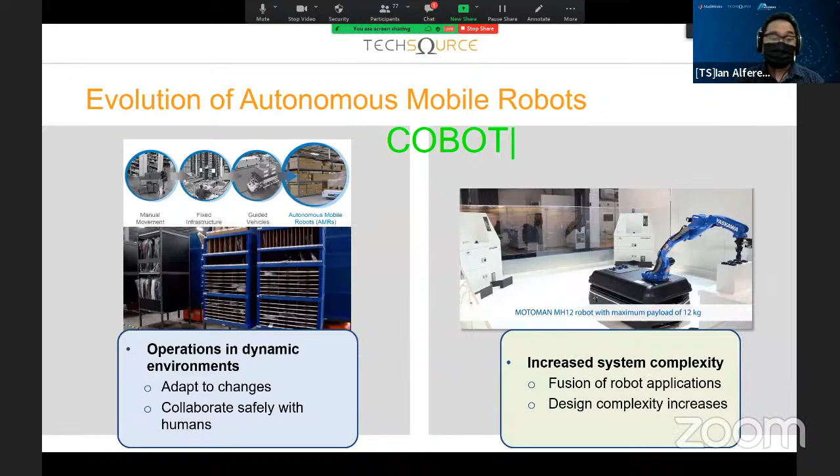So generally speaking, all of these robotic systems are becoming really, really complicated. So first things first, there's like two things now in the robotic space. One is actually cobots. When we talk about cobots, that's like a robotic system that involves a human person within that particular field. So it means there's a human person within the space of the robot, and they need to work together. And in this kind of category, there's a lot of things to consider - there's probably safety, probably complexity in terms of avoiding a human being, or deciding something for itself to be as safe as possible. And it becomes as complex as it is.

So right now, your ground vehicle is connected to a particular arm itself.

Let me just restart my PowerPoint. Give me a sec. All right.

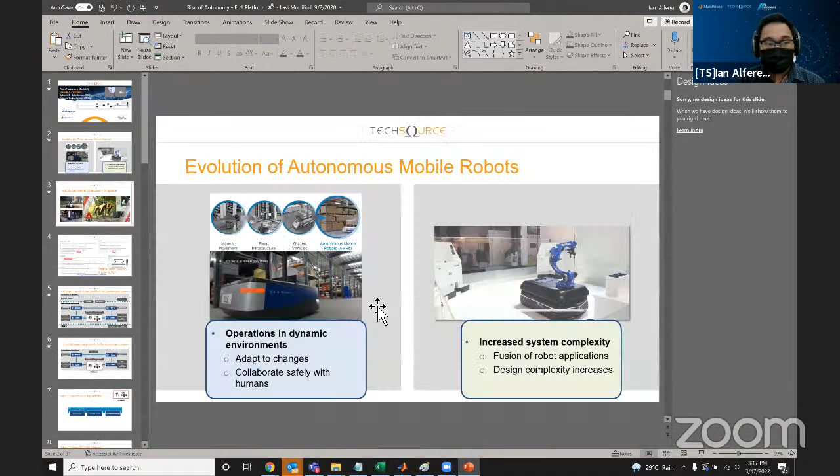I created this slide about a year ago. One thing you'll notice is that here in Singapore, where I'm based, there's a lot of hype. I'm not saying it's not justified, but there's a lot of investment pouring into startups, student organizations, and student competitions involving robotic platforms.

You'll notice here is an AGV, a ground vehicle. This one is also an AGV, a ground vehicle. This one is what we call a quadruped robot, so the walking dog robots are actually called quadrupeds in some sense. You'll notice they probably attach a lot of sensors.

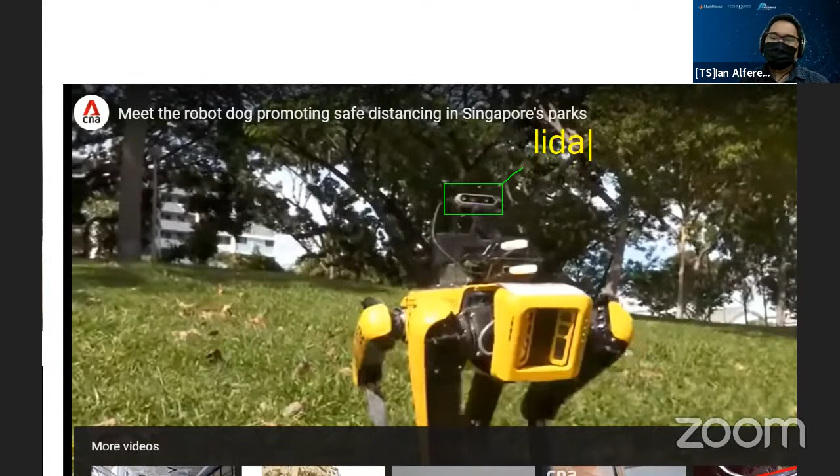Let me zoom in really close. You'll notice this is actually what we call a LiDAR—actually, no, it's a stereo camera. And then you might have other sensors here, like your IR cam, your typical image camera, and so on. So there are multiple sensors this robot can have, but you need to understand what they're going to be used for.

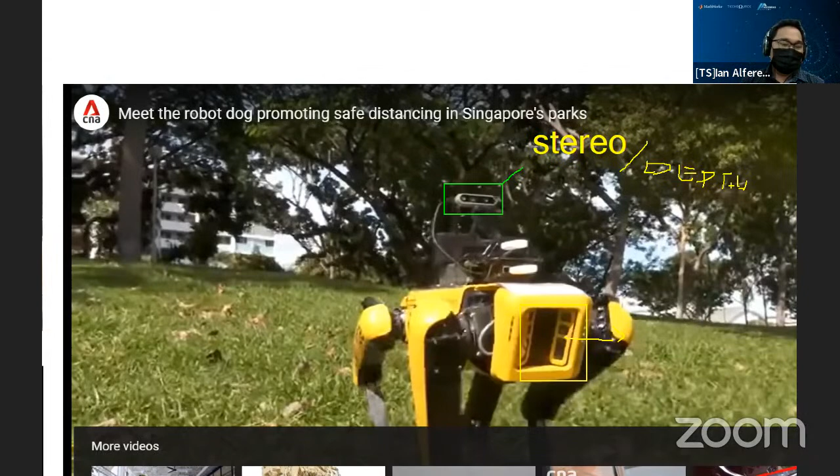First things first, you need to do the platform. The platform is basically: is it going to be a ground vehicle? Is it going to be a quadruped? Is it going to be a UAV? Is it going to be a surface vehicle? Is it going to be an underwater vehicle? All these things need motion models, or kinematics models, because that's what we want to control.

So there's MATLAB, MATLAB and Simulink, there's ROS, and as I mentioned earlier, there's Gazebo, Unreal Engine, Unity. These are pretty much all the things you might want to be familiar with if you want to go into that particular space, or in your future career as well.

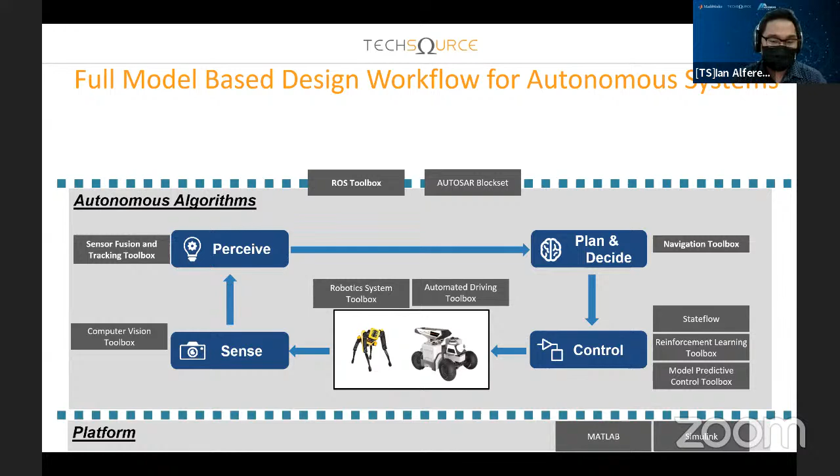So in this topic, we're going to focus more on the platform, then we'll talk about perception, sensing, and plan and decide later in the third episode.

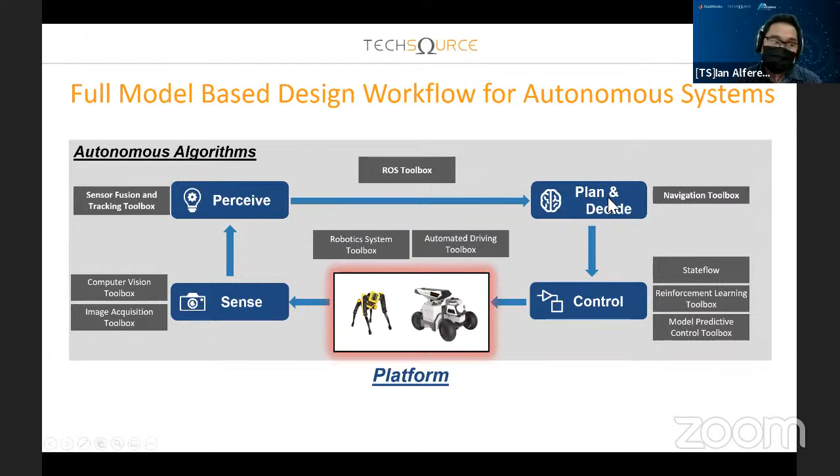In the space of simulation, there are actually three things that MATLAB can do or import. One is what we call a physical model. Second is an abstract model. Third is that you can get an external robot model from the vendor itself.

If you're going to create a physical model, you might need your model from Solidworks, NX, Onshape, or any CAD platform, and bring it to Simulink and simulate. This is where your mechanical engineer is really good at, creating different models in their CAD environment setting. But in a CAD environment, you cannot simulate a kinematics model. It's really just creating that assembly and building the necessary components, but you cannot do kinematics modeling from there.

The other thing you can do with Simulink is bring in a kinematics model. What I mean by a kinematics model is basically an equation form of the system. If you think about a robot, what we want from it is really all about its pose and orientation, because this is what we want to control. Pose means to say, where am I in 3D space? This is your X, Y, and Z. Orientation is more towards pitch, yaw, and roll. So pretty much you're trying to have a system that can move in free space but has these properties.

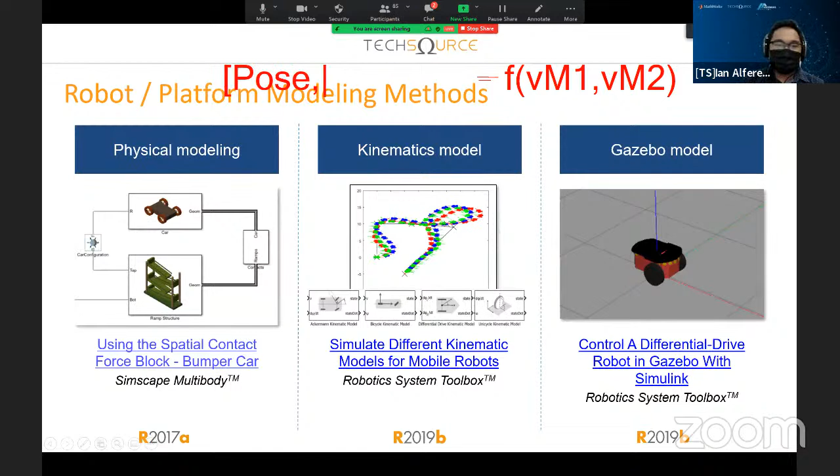I move the motor 5 meters, then the robot will move 5 meters with a certain orientation. So imagine what we're going to do is create an equation: F of velocity of motor 1, velocity of motor 2. The results of this are basically our pose and our orientation. I'm not going to give the full equation here, but this is what we want to do. The question now is, what is your F?

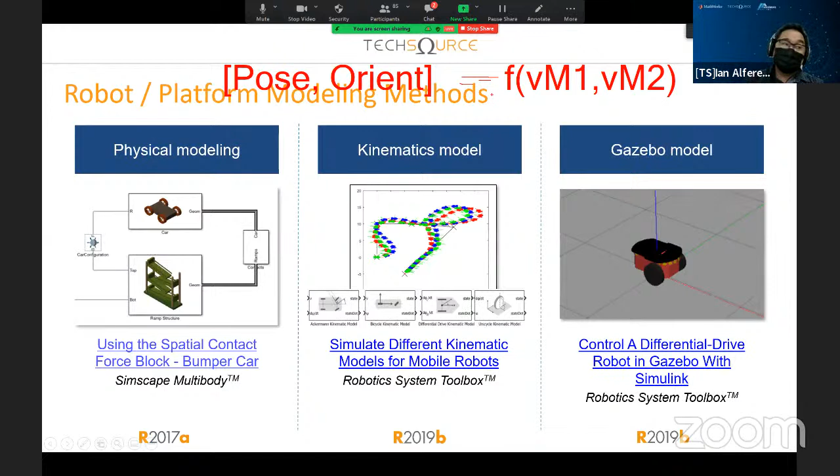This goes back to mathematical equations. I'm not saying it's a hard topic, but your fundamentals in calculus, algebra, geometry, and trigonometry would be very important here. This is where you actually develop that kinematics model.

What MATLAB offers is that there are already ready-made blocks for common robots. You would see here an Ackermann kinematic model, which is probably similar to a car setup, a bicycle kinematic model, a differential drive—this is actually our example later—and then a unicycle.

The third one is basically a Gazebo model. When I say Gazebo, it's actually a third-party simulator, but the majority of your robot makers—like Kinova, Kuka, Universal Robot—or any vendors of robots in the commercial space normally have a Gazebo model of their robots.

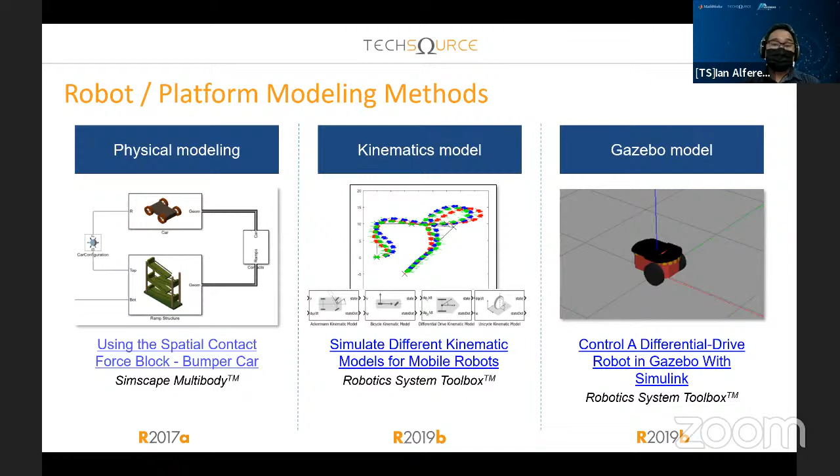So if you think about a kinematics model, you try to really go back and solve the kinematics equation. You need to study back your trigonometry, algebra, calculus, and advanced mathematics in some sense. But later, I'll give you an idea how to solve a very simple equation for the differential drive kinematics.

So I'm going to go for physical modeling first. Normally when you have a physical model, you start with Solidworks or any CAD design. But the nice thing about MATLAB and Simulink is that we do have the capability to bring in CAD design directly to MATLAB and Simulink.

One thing I really like about this workflow is that when you build your model in CAD, it already gives you the properties of your weight, the inertia required to move a particular object, and the type of material you use. We're not just bringing in a property like, I have a box and this is its kinematics model. What we're doing here is you have the design of the robot itself in a CAD environment, which already has its properties in terms of weight, material, and so on. Then we can bring that information to our simulation.

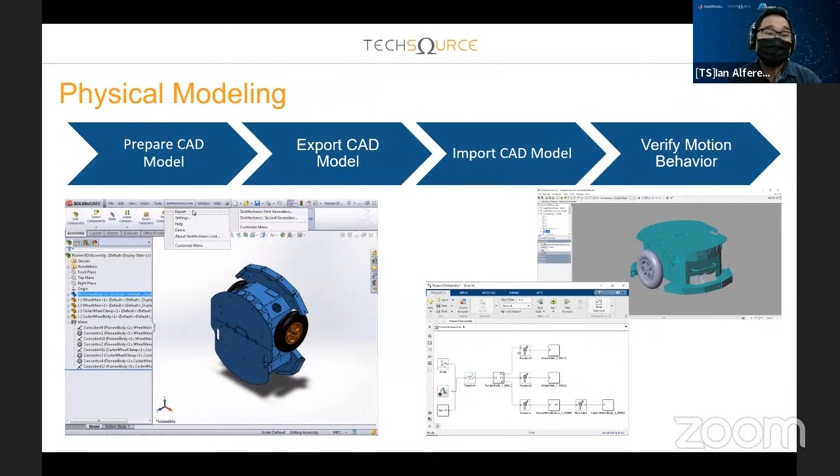But in this case, we just say, okay, I have a CAD design. I want to bring it to Simulink. So generally speaking, for SolidWorks or any popular CAD design software, we can actually just bring it to MATLAB and Simulink.

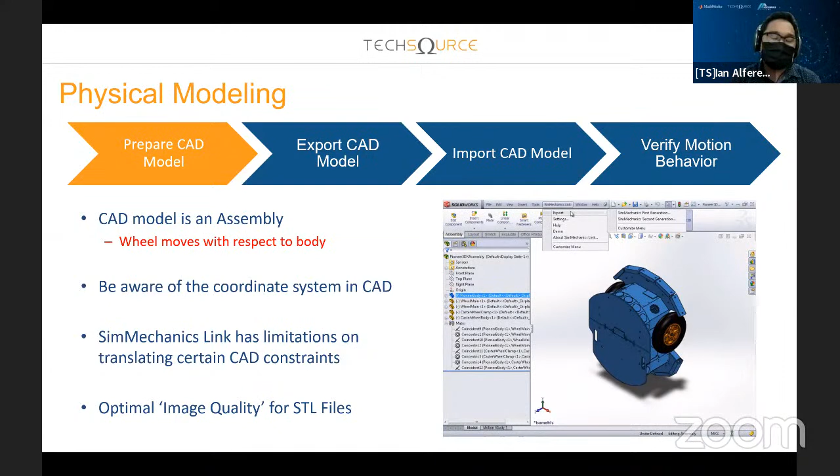So this is just a very simple use case, right? We prepare the CAD model. We then say, okay, I'm going to export. So you would notice in SolidWorks, there's just an export tab here. Then we just generate the SimMechanics, so this is the old name for Simulink, Simscape multi-body.

Right, so you export, you get all these STL files. If you're familiar with STL, basically that's your CAD design already, right?

There's just something wrong with my PowerPoint today, that it keeps on restarting. Maybe I don't need to put it in full screen mode.

Right, so once you have all these STL files, the next thing you want to do is go to your MATLAB environment. And from here, we just need to tell MATLAB that I already have an STL file and use the function smimport.

So once you have the smimport, I am just going to get this XML file and press enter. Normally the XML is actually just the mapping of how all these STLs are connected, right? And once it's there, you will get a Simulink environment of that connected parts.

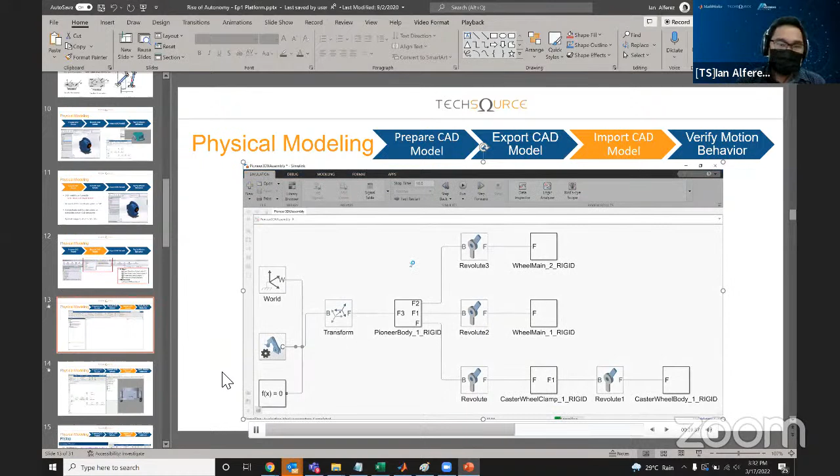So when I press the play button here in Simulink, you will notice that I have this model already, right, in Simulink perspective, not in CAD, but in Simulink perspective. So I can move it around, I can add some movements and so on and so forth.

But what we're trying to do here is bring in models to Simulink so that we can add in some blocks that are necessary for us to build the robot physical model, right?

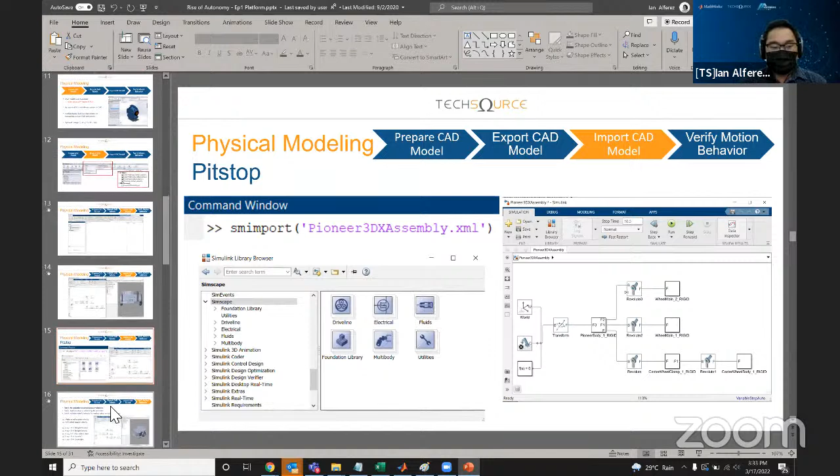So if I have the model now, I need to verify my system, right? So since I have the CAD model already, the next thing I want to do here is increase the size, and just verify some behaviors or characteristics of the system.

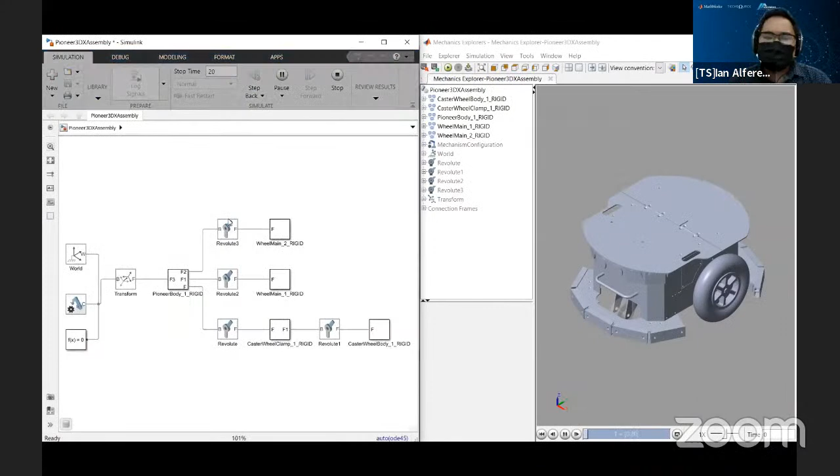So you would notice actually the caster wheel, this wheel is actually moving without any actuation. And this is due to the different setting of the gravity. So here I just say, okay, maybe when we try to import it from SolidWorks, there's some discrepancies on where gravity is being associated.

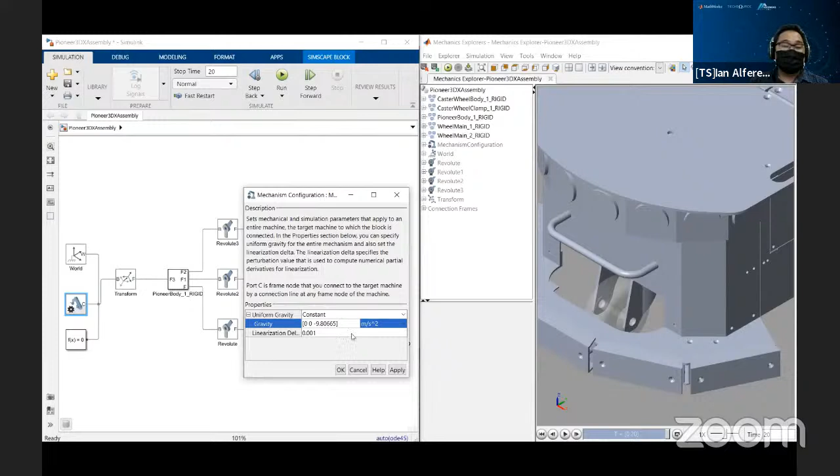So I just say, okay, maybe it's going to be in this axis. Then I click apply, click OK. And when I simulate it again, I should not see any movements at all already, right? And here you will notice it's not moving anymore, okay?

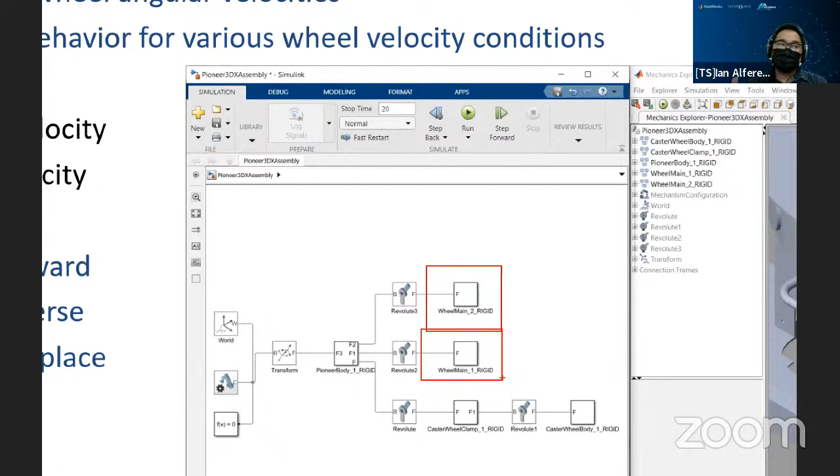All right, so next one is I want to turn the wheels, right? So because I know that this is wheel number 1 and wheel number 2, how do I tell MATLAB that I have a motor attached to this wheel? Or I have a torque source or a command from a motor to turn 50 RPM, 20 RPM, 10 RPM, right?

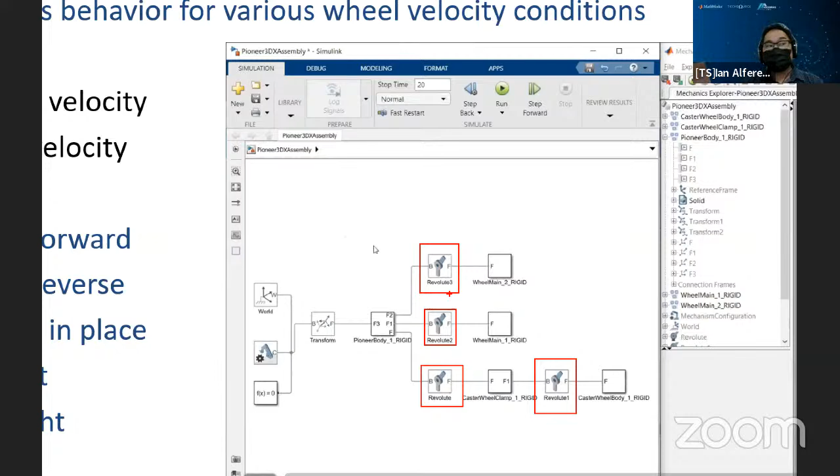So the nice thing about MATLAB is that since I already have these joints, revolute joints, this is actually coming from the design that you have in CAD saying that this is jointly attached with a revolute joint to the main body. That means there is probably a bearing, a motor, a servo motor that allows it to turn on that particular joint, right?

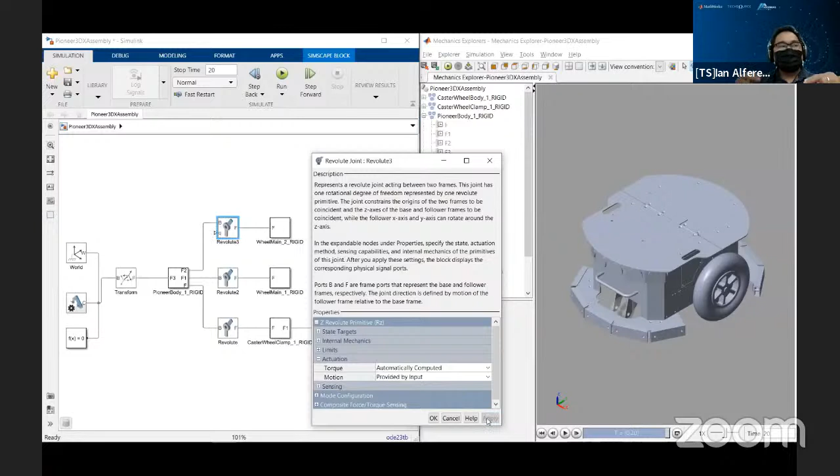So if I just go and play that section here, you will notice that there are some options for me to add sensing and actuation. So here I just say actuation first, but the idea here is that there is a motor attached to the system.

So I can then say, I just have some blocks here, a constant block and an integrator block. Do take note, this is in the space of like meters per second or degrees per second or radians per second, right?

So I'm trying to tell that particular revolute joint that you're moving at a certain rads per second. When I integrate, I just put one here. Then when I press the play button, you'd notice that I can actually move the wheel, and the wheel is now turning. I just changed the view, left or right, and the wheel is turning.

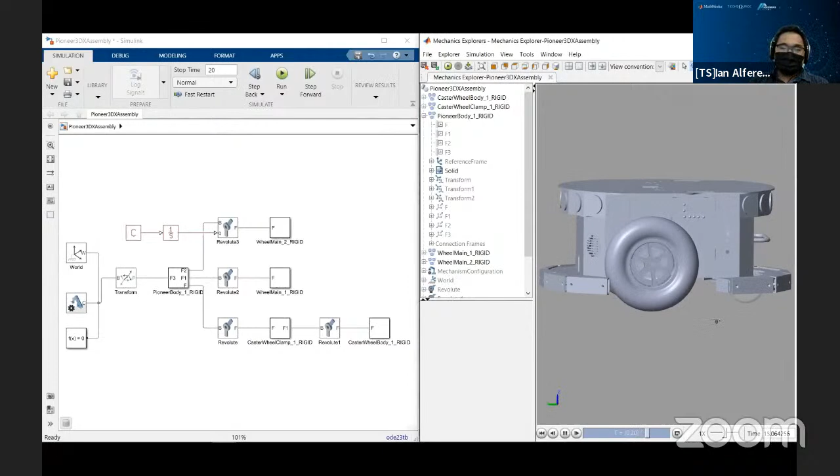You'd notice also in that particular setting that motion is provided by input and torque is automatically computed. Just imagine yourself, you have a motor control. Definitely you have a PID controller for that. It's a closed loop system. So when you tell a system to run at 20 RPM, the PID or closed loop controller will tell you, I'm going to run at 20. No matter how much torque is required, I will turn at 20.

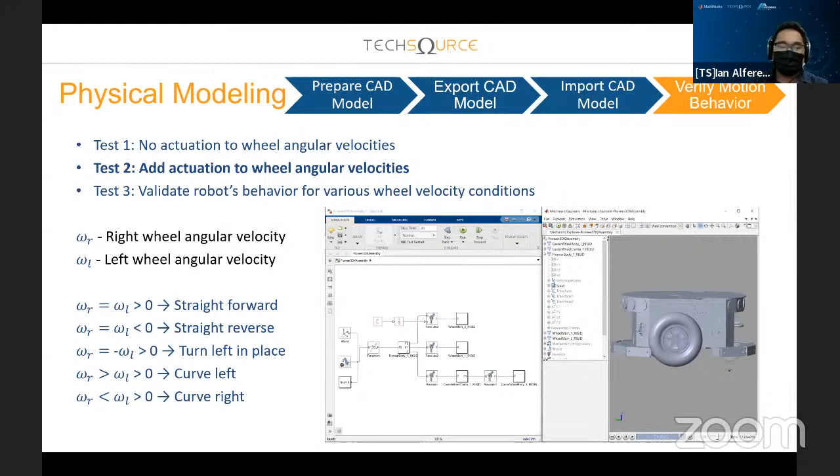So this is like that kind of setting, where I'm just controlling the motor to spin, right? But now what if I'm going to add in the motion model of that particular robot?

As I mentioned, this is where you need to go back to your trigonometry, your algebra, your fundamental mathematics, because once you have all these things, I want to create the equation of the pose and the orientation. So if you think about it, what I want is to control the speed of both wheels and understand its movements. I want to create a relationship between velocity of left wheel, velocity of right wheel, and its pose and orientation.

You'd notice this is the typical equation of a differential drive system. Just imagine you have a differential drive system. A good idea is that if this wheel is at 20 RPM, and this one is 15 RPM, so this one - I'm going to use red color - is faster compared to this one. So this one would travel faster compared to your right wheel, meaning it would turn right. So you can actually steer the system with this setup.

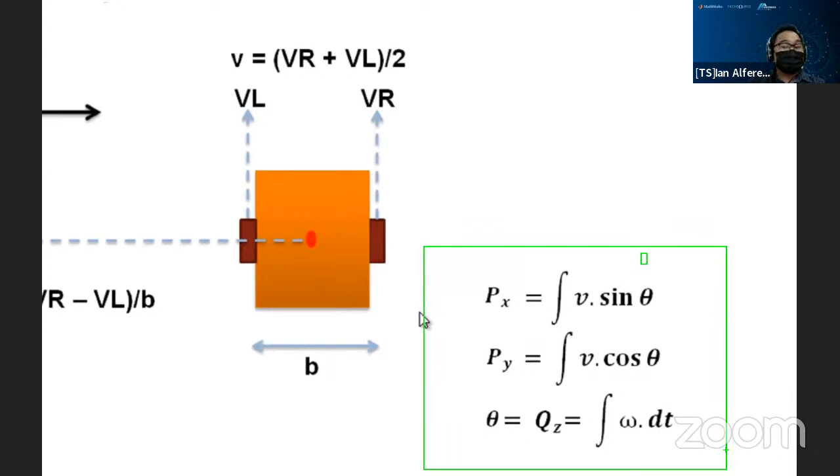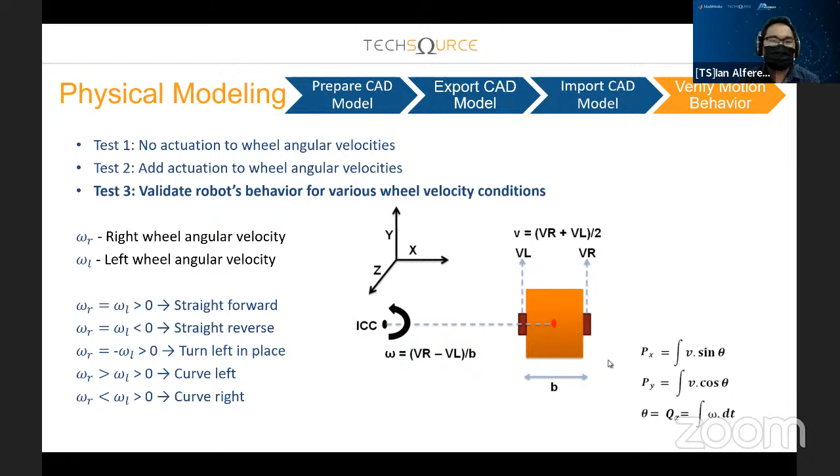So with that kind of idea and concept, you can build your equation. The question now is, how do I come up with these equations? Generally, this is how you'd write it in the motion models. You start off with a graph, that this actually has certain points on the system in 3D space, and you need to model it. But as I mentioned, there are already popular equations for certain robot models - it can be a robotic arm, a ground vehicle, a car, or a motorcycle. This is already a given set of equations.

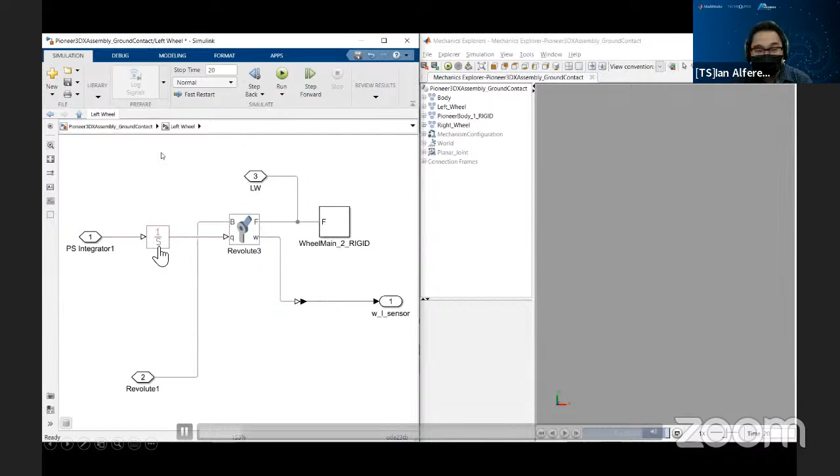So in Simulink, what I did is I brought all these equations into Simulink. If I move further, I still have my plant model from the CAD design. I know that I can control it through this block here, but I just added sensing - imagine it's a virtual sensor. I'm adding a virtual sensor, but in actual terms, this can be a tachometer or an absolute encoder or something like that in an actual vehicle.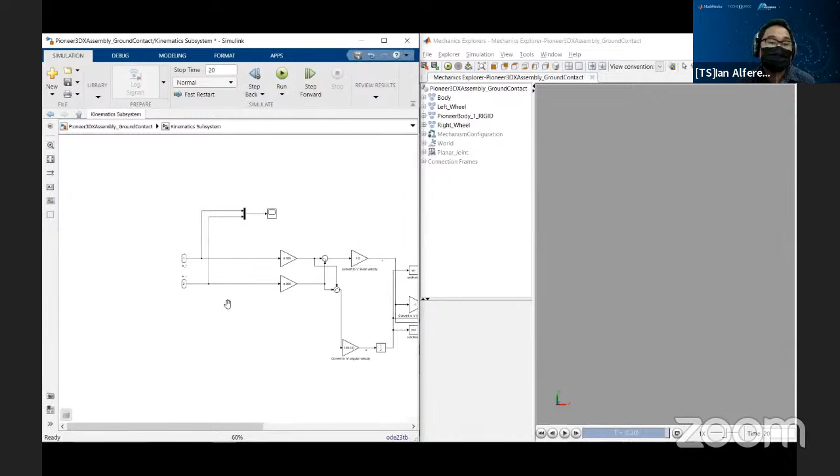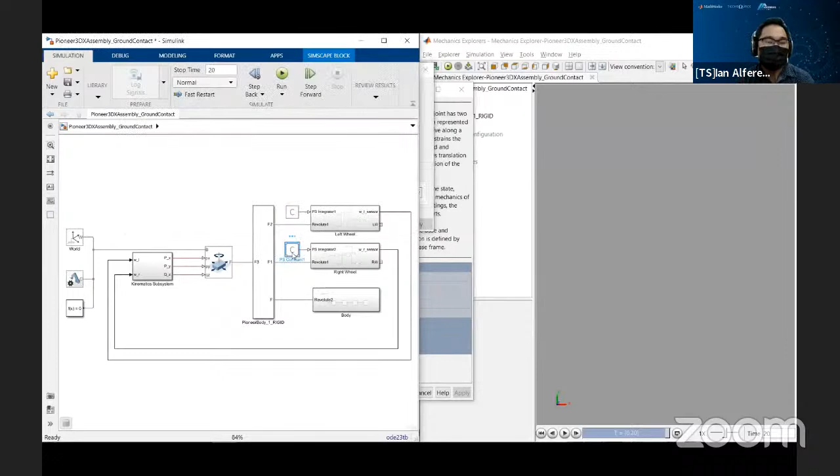And the equation that you saw earlier is actually made into a Simulink block. I just place it here in this subsystem. So now I have this planar joint to make it like this is my platform, my space that I want to move left and right. Based on what I mentioned earlier, I want to have a setup wherein everything is equal, and then the robot would move straight. What if now my wheel has a different setting?

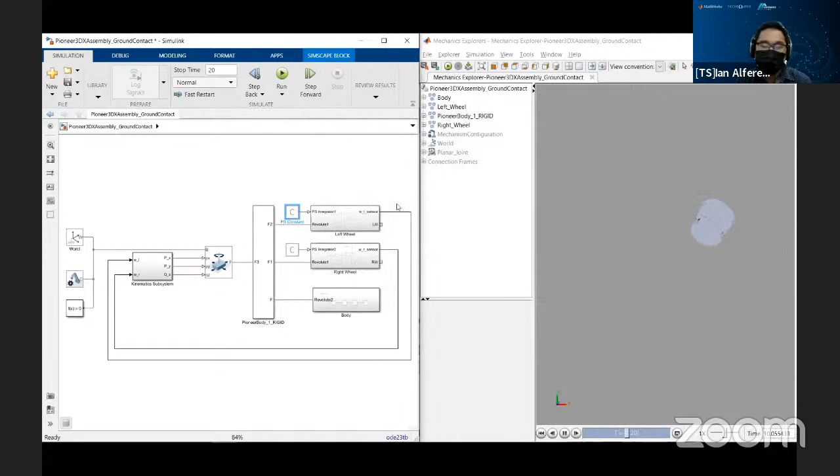Left wheel and right wheel have the same value, but one is negative, so it turns at its own location. Next, I have like 0.5 and the other is 1, and definitely it's going to turn left.

Okay, so the idea here is really creating that motion model, at the same time bringing in the information about the weight of the vehicle, the torque that I need to move the vehicle, and also its kinematics model. So once you have this platform, just take anything already, it can already do whatever you want to control without even buying that hardware, right? Because I'm already controlling it.

The next thing that I can do is probably add in PID controllers, right? Because when you have your platform, let's say this is your robot, and this is part of your control systems, there's going to be like a feedback. And when we say we have our sensors, definitely we know that since we have the kinematics, a function of velocity of our left wheel, velocity of our right wheel, the output of this one is basically our pose, X, the location in the X space, location in the Y space, in the Z space. But let's say a ground vehicle is always operating in a plane, so we don't need to go for elevation. And what we need is basically just the angle.

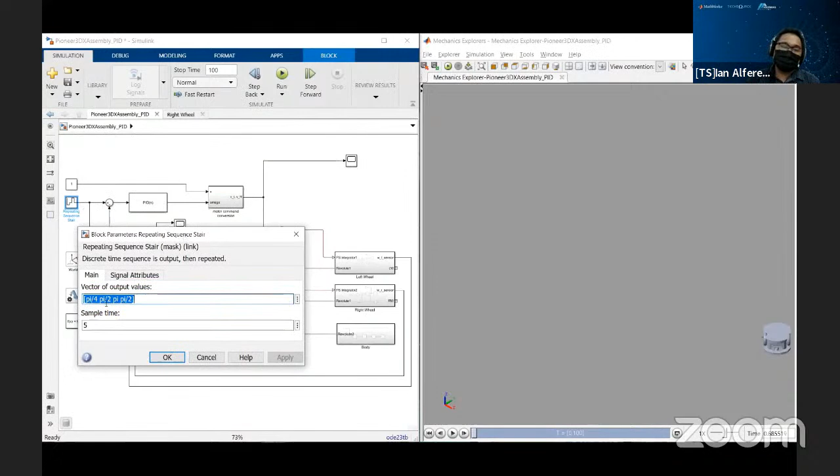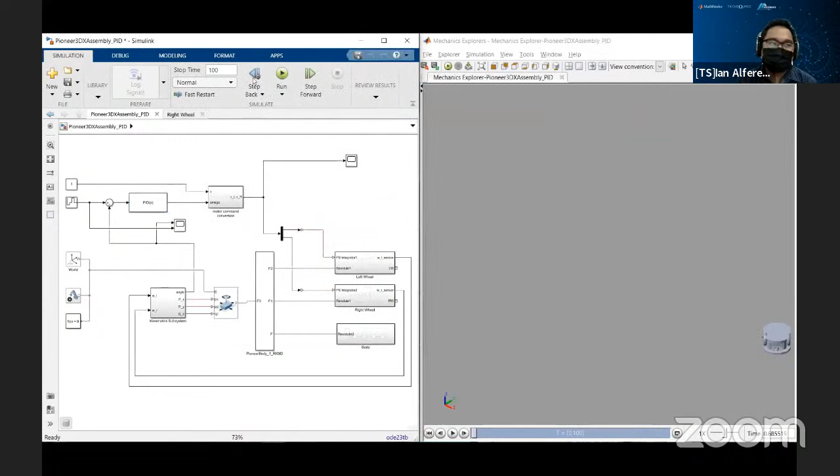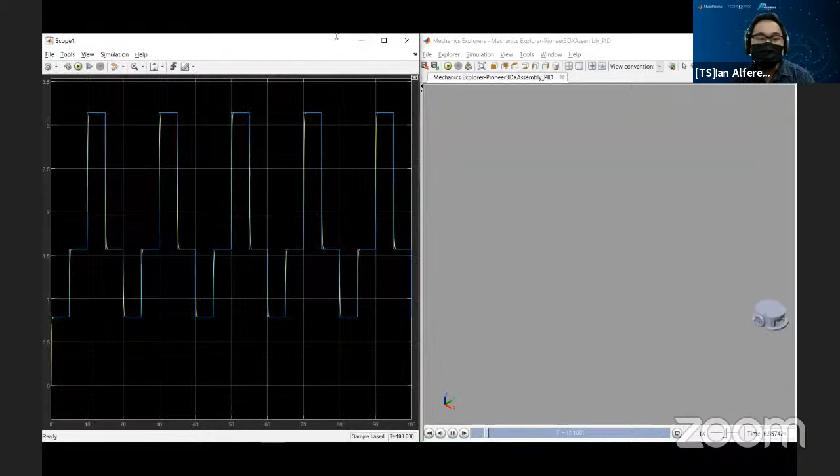Oh, can you move in pi by 4, pi by 2, pi? So this is actually telling the robot to move in a certain space. This is just an example, but let's say you have a maze or a warehouse, and you want the robot to know from point A to point B, I have this path for you. Please follow it, right? And then you would notice that it will follow that path where I am guiding, or giving it a trajectory where and how to move, using a PID controller.

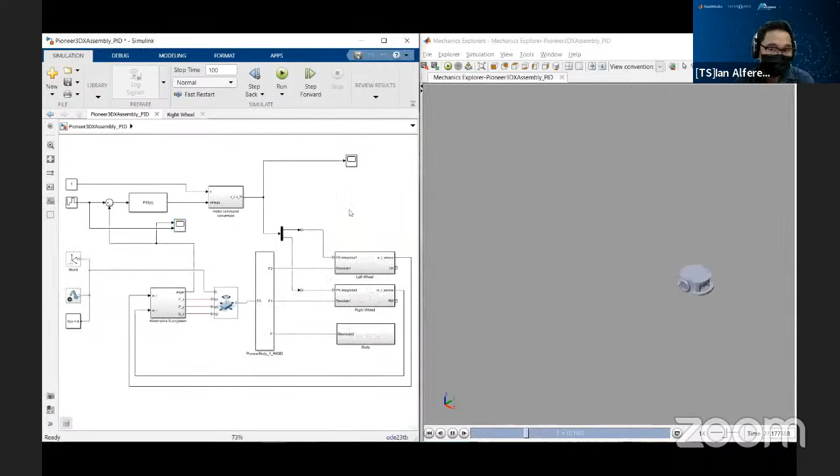So again, when you are developing a robot system, first things first is really you need to have that robot. So it's either you buy it or you create a simulation model of that robot. Now the question is, what's going to be your application? So this is one case of that application already. And I haven't talked about sizing of the motors yet.

Like when I say sizing, there's a ton of motors available out there in Alibaba, AliExpress, Mouser.com, or Element14.com. There's a lot of types of motors, but which one would you buy? You're going to just say, okay, I'm going to buy a 24-watt motor, or I want to buy a big battery, this size of battery, but your application is actually just 20 minutes or 30 minutes, not a one-day application. And this is where I think later on, once you use Simulink, this is where you can actually do sizing of that particular setup.

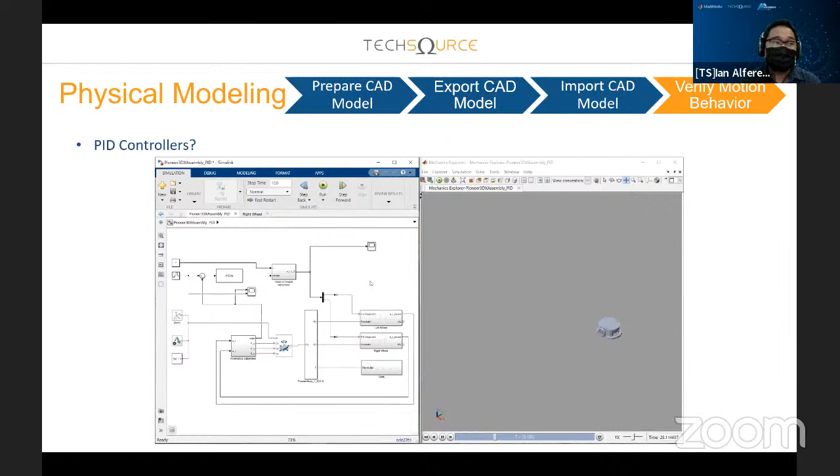So what about the Boston Dynamics spot robot, right? Because I just have here a very simple robot model. What about a difficult quadruped robot? So it's the same thing, but the difference is actually it's a bit more comprehensive to control, a bit complex to control, because you need to do what we call as gaiting.

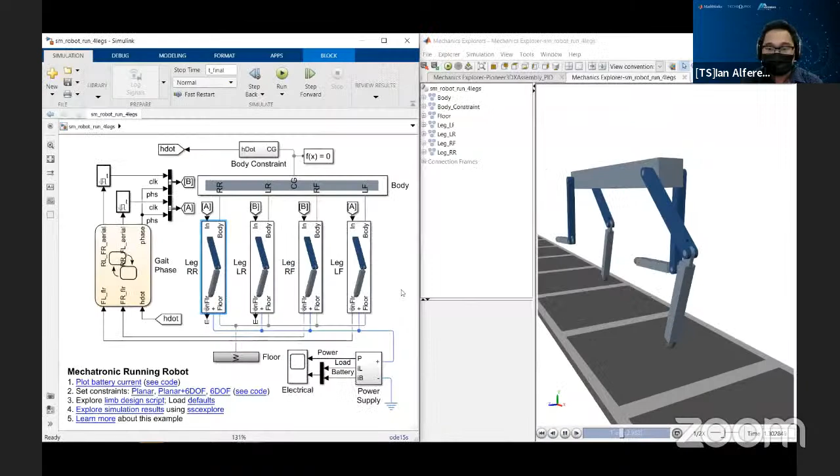Gaiting means to say, when you walk, you have a particular pattern on how you walk, and it's basically just a lookup table by default, or how people would develop it, as a lookup table. And what you want to control is basically your center of gravity. You need to maintain that, because if you're going to turn, it should be in the same setup. If you're going to twist or do certain things, then this one should be something that you will control, the center of gravity or center of mass of the system. So this is just an example of that. But the nice thing about Simulink is that you can bring in all this design setup.

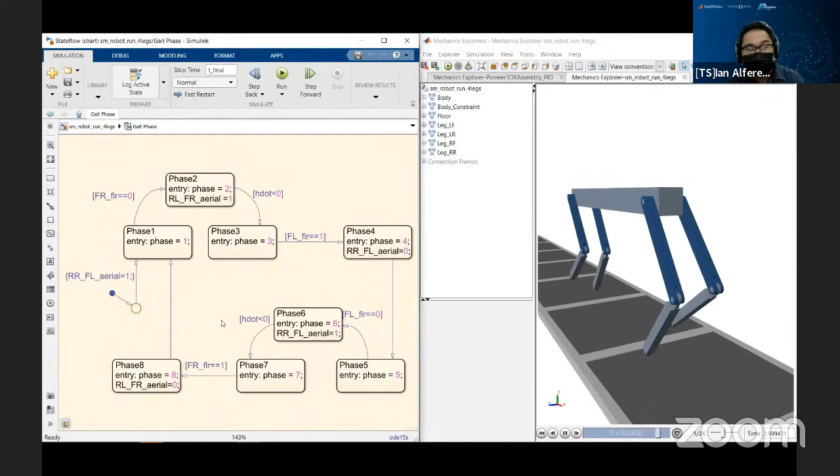So this is the left leg, right leg, and then this is the gait phase. This is like a human person walking, right? You have to record your pace, like when you strike the floor, that's phase number 1. When you lift your feet above the floor, that's phase number 2, and so on and so forth.

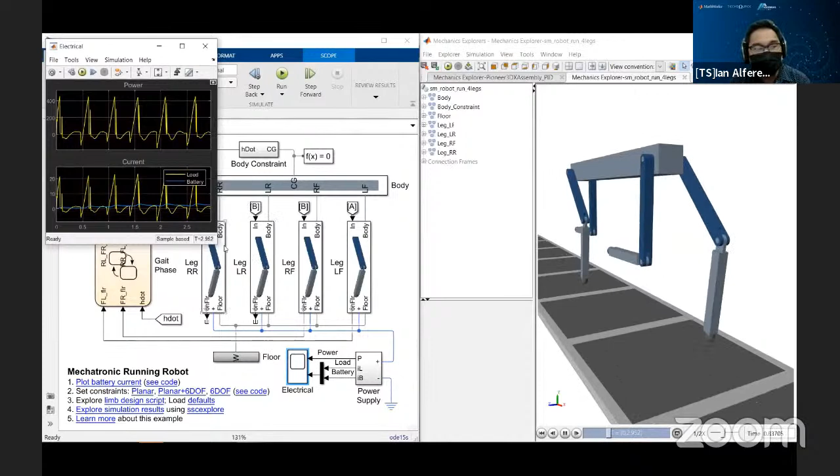And when you are in Simulink, as you've seen, there's a power supply model. You can add in a battery model to understand, okay, I have the system, how long would it last? Let's say it's a 4,000 milliampere battery. How long would it last?

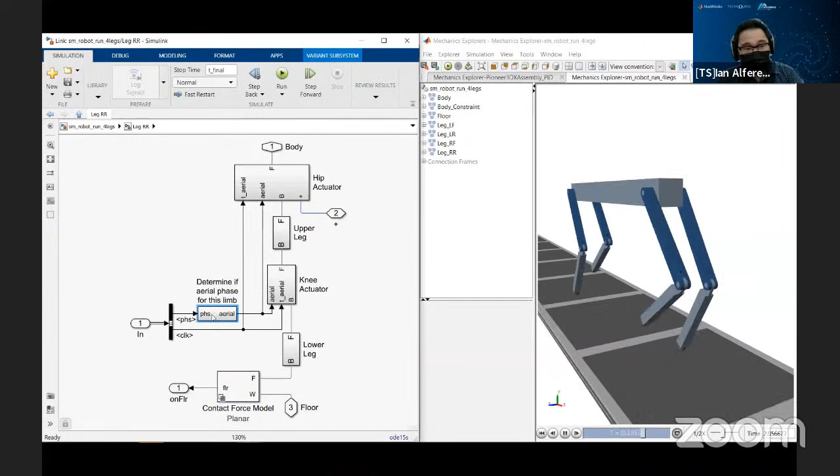And basically you can also add the movements of the wheel and also its gait positions. So this is the trajectory for that robot to move. This is actually just, as I mentioned, a lookup table, so that it follows that movement, so that it can move forward or move backward.

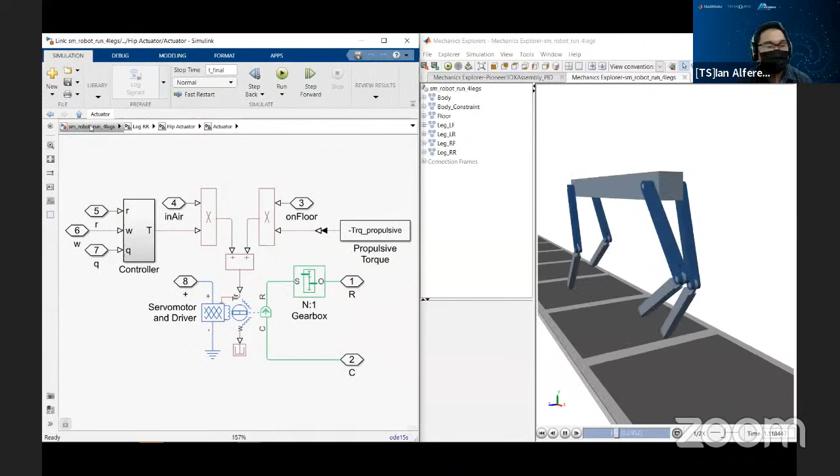And again, you have the revolute joint, and also you will have the actuators. So you can then say, okay, I need this motor model or this motor specifications as well. And as I mentioned, you also have a controller from here. So again, you don't really need the actual robot itself. I think this is something that you can actually download on the website.

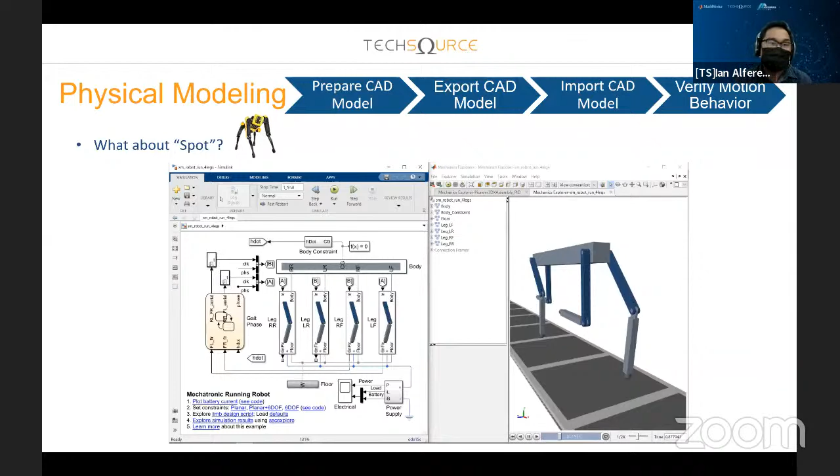So it means to say, if you want to have a spot simulation, you can just get this one from the Mathworks website, and you can already create your applications. It might be an image processing application with the quadruped robot, or a certain use case for that quadruped robot.

All right, so this is actually my last slide. But to think about it, we're just modeling on the platform. We know the kinematics equation of the robot, we know what sensors we have with the robot, we know how to control the motors of the robot. And now the next phase is actually to do some sensing, some complex perception of the environment, and also probably planning and decision making.

So for example, let's say you have a maze, then you want to go from point A to point B, and there's a lot of obstacles in the middle. So everything will come together: sensing, perception, plan, design, and control.

And again, why you want to use this simulation tool? As I mentioned, there's a lot of things that you need to simulate first. I just have the plant model of the robot, but generally speaking, you need to do some controls. I have an example there with PID control, but generally in the robotic space, you need to probably go to model predictive control, which is advanced controls, gain scheduling. You might go to reinforcement learning as well, if that's your research space.

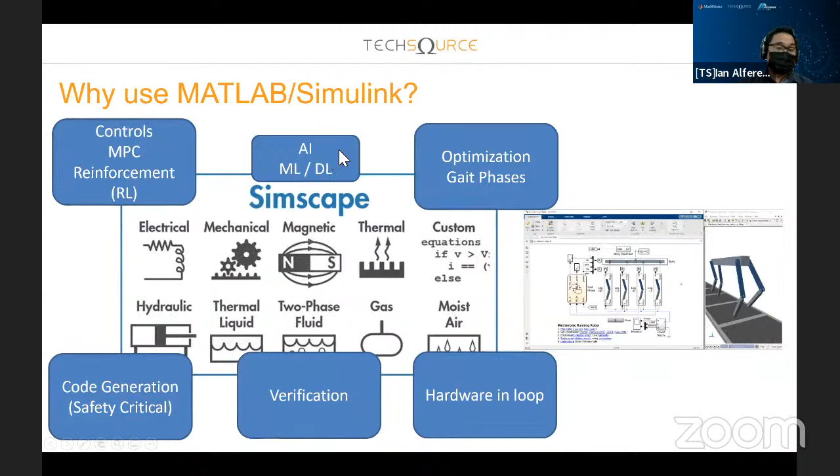And you might want to add applications for artificial intelligence as well. And I think Bang already mentioned about the campus-wide suite. So if you do have the campus-wide suite license, everyone has access to MATLAB and Simulink.

And I'm not saying only one is going to use MATLAB and Simulink, only the electronics department is going to use MATLAB and Simulink. It can be your mechanical engineer, it can be your computer science students, it can be multiple students. Because if we go back here, on how to develop an actual robot, it's not only one discipline. You have a discipline from the mechanics side, you have a discipline from the electronic side, you have a discipline in your computer engineering and computer science. It's really the combination of all those disciplines to come up with a robot.

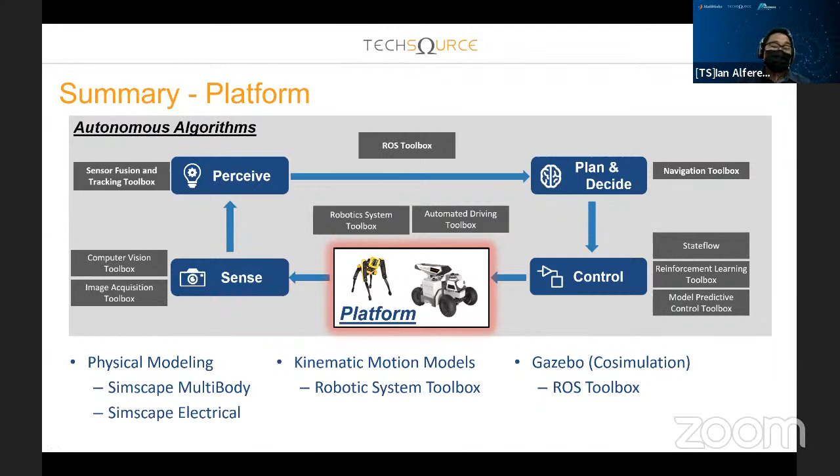And here we're just talking about the platform. It's heavily invested in terms of the mechanical engineering or electromechanical engineering. But after that, the next work is more towards computer science or computer engineering. If we go down to ROS, it's going to be a bit different, it's going to be on the communication side as well. So as I mentioned, it's not about only one engineer who's going to use the tool, but it can be multiple engineers as well.

So I think I have some slides here to go through a follow-up. If you want to learn more about MATLAB and Simulink, I can point you to this material, MATLAB on-ramps, so you can get started.

Especially for students who just joined the session, you can go through these on-ramp sessions in MATLAB and Simulink. It's in the link in my slide. You just click launch, and from the MATLAB on-ramp or Simulink on-ramp, you can get a certificate. Once you finish the on-ramp sessions, you can put it on LinkedIn, Facebook, or download it as a certificate, and get a basic idea on how to use MATLAB and Simulink. So that's just the MATLAB on-ramp.

But if you're into other topics as well, there's Simulink, circuit simulation, machine learning, deep learning, reinforcement learning, image processing, signal processing, Simscape, Stateflow, and control design. These are free tutorials, so you don't need to wonder where to learn MATLAB and Simulink. You can start with these, but after that I think you need to look for professors or someone really familiar with the tool, so you can become more familiar with it yourself. So please go through the slides, and I can give you the resource.

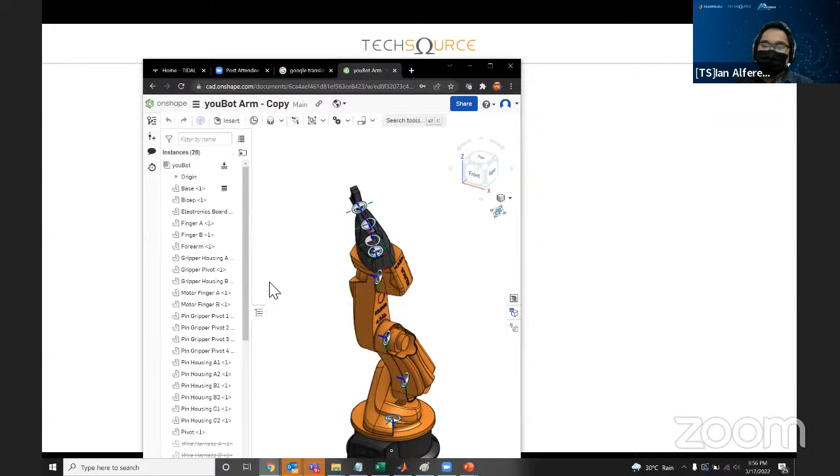But there's one I actually use, Onshape. Just to give you an idea, this is free. I'm not promoting Onshape, but it's good for students, or if you're doing non-profit work, maybe you can try it. I have my own account here because I do my own 3D printing and my own designs, like a bike stand I created. It's free, but the caveat is, since it's free, your designs are exposed to the internet, so anyone can access them.

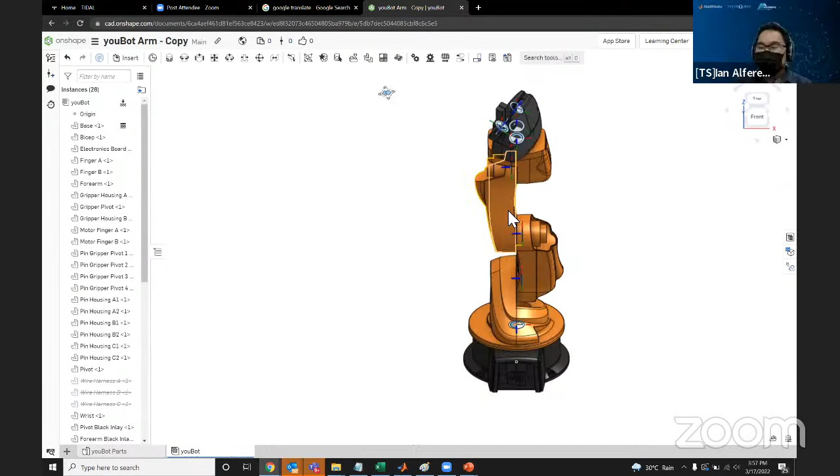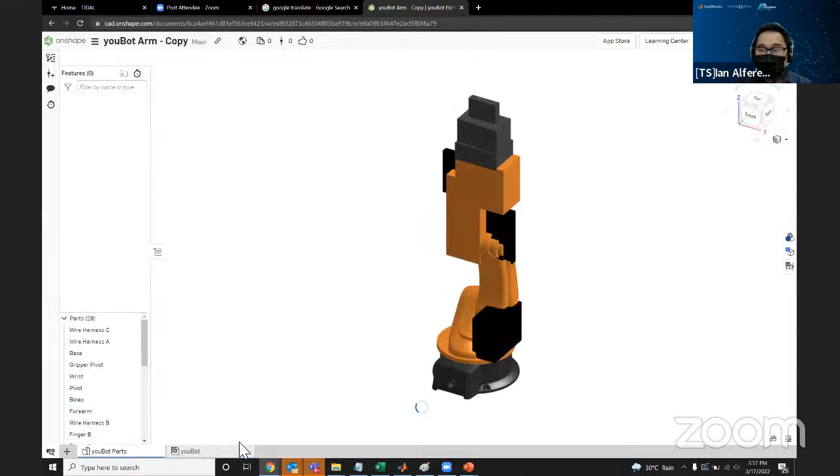For example, this is a CAD design of a KUKA robot. I think the point is as long as they can export to STL file. So if I go to share here, I can export this to Simscape Multibody, or I can close this and save it as an STL file. You can see if I click share here, someone can just go to Simscape Multibody and access it already. In MATLAB, we just need to copy paste this.

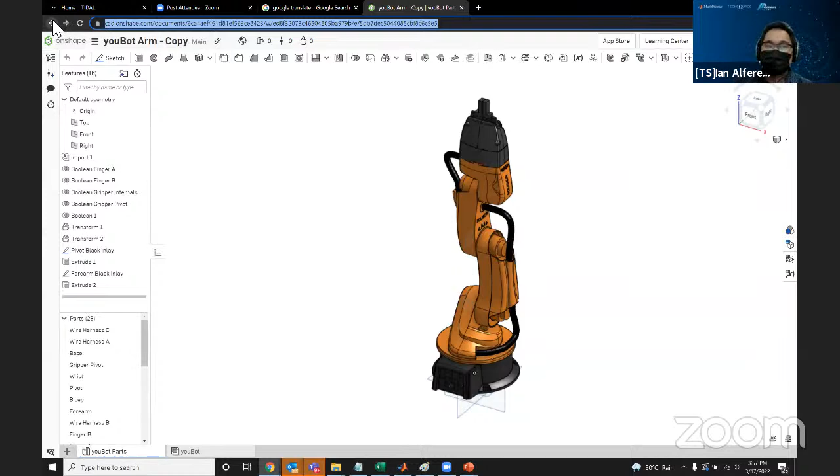Just to give you an idea, I have this design in Onshape. Maybe I'll look for another one, like this servo motor design I made a long time ago. I can copy this, go to my MATLAB, and just do doc Onshape, just to give you an idea. So this is the first step, where we get the 3D data.

After you design this, generally you design it in Onshape, which is a CAD design tool. Once you have that, what I need is basically the website address where it's placed. I copy it, go here, paste it, type it in, go to here, copy paste this, press enter, and then I think it will ask for my credentials in Onshape. Give me a sec.

Okay, so it's already confirmed that I have an account. Then it just brings in that data, right? So once it brings in the data, the next thing I need to do is...

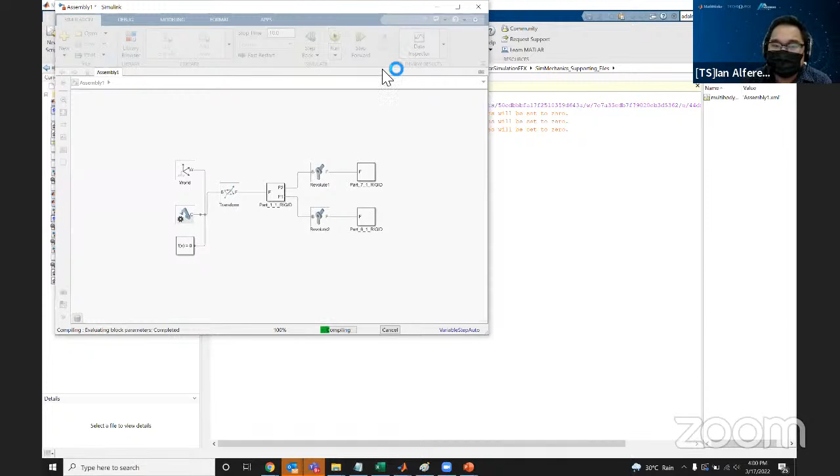So once I have that one, this is my Simulink block of that robot model. If I press the play button, this is the design that I have earlier. This is already in Simulink. So just to give you an idea, you can bring in a design from somewhere. There's no gap between designing something in a CAD environment and bringing it to MATLAB. It's already here, right?

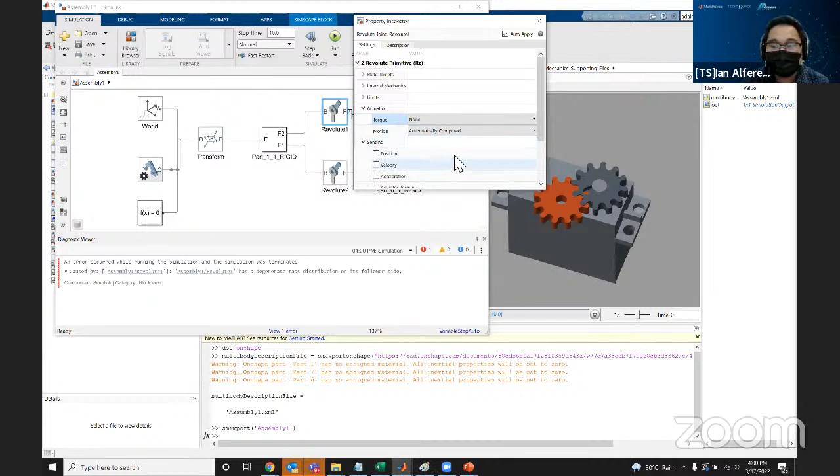And as I mentioned, now I can control it. Maybe I have some actuation, some sensing, and so on and so forth. I think the important thing also is they have to build the 3D data with multi-body, right?

Not necessary. This one is automatically built for you. So what I did is basically I have a design in a CAD environment, this one, right? And from the CAD environment, automatically all this information, how it's being connected, is actually from this XML file.

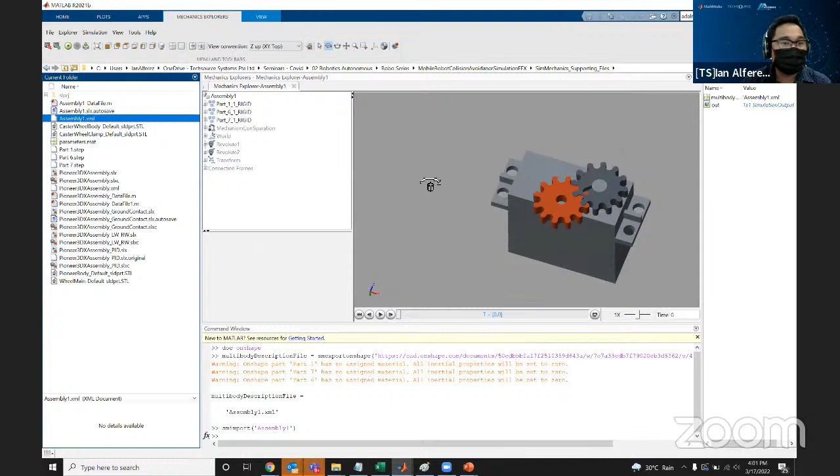So if I open this XML file, this is actually the information of how everything is connected—like connected 1, connected 2, connected 3, that kind of setup. So I don't need to manually do that connection. It's already here. You can do that manually if you want to, but this is just an automation to bring that design into Simulink.

Yeah, because as a designer, it may be very difficult to design with the multi-body design. That's the first issue—like I have a CAD design, but I want to do it in Simscape multi-body. Then I need to do it manually. Here it's a bit of a shortcut, so there's an automation tool to bring all these things into MATLAB.

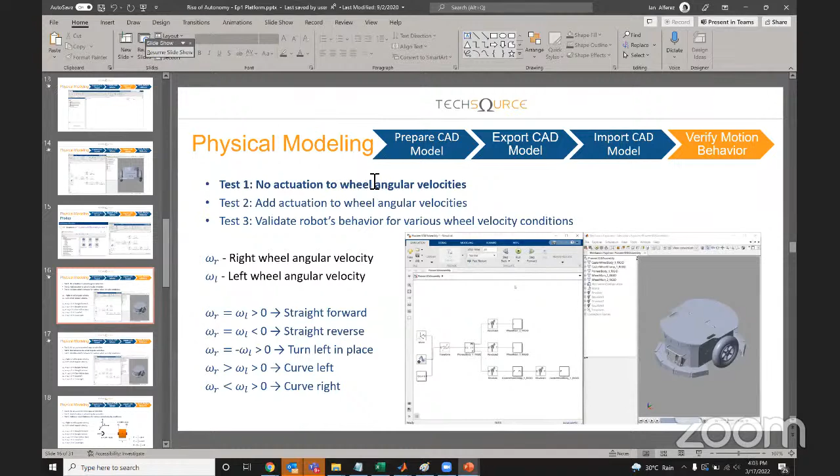Okay, I think the other one is from Pak Basit—I think this is not a question. He mentions STL can be exported from Google SketchUp and Autodesk Inventor too. I think yes, Autodesk Inventor and SketchUp too—I'm not sure, but SketchUp can also export to STL. How's it, we can check.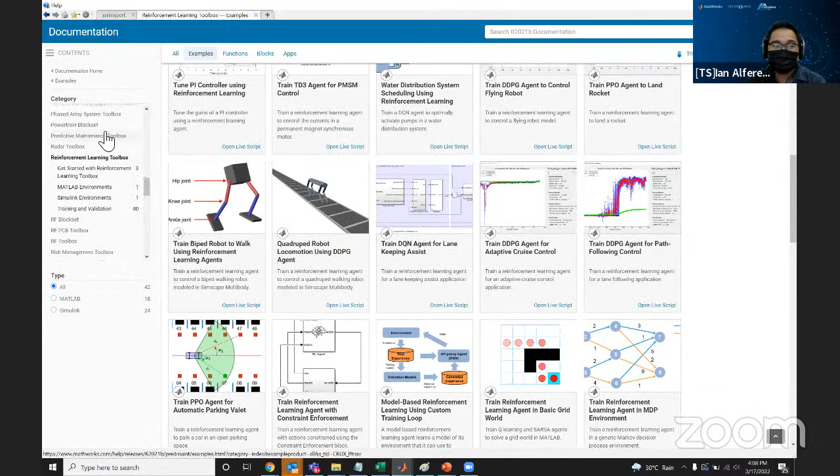But if you think about it, these are usually using what we call blocks. So if I go to Simulink here, let's say I just go to deep learning, that's the most common one. And I go to examples in Simulink - there's 17 examples. So you can see there's lane and vehicle detection using deep learning using our tools. So if I click on this...

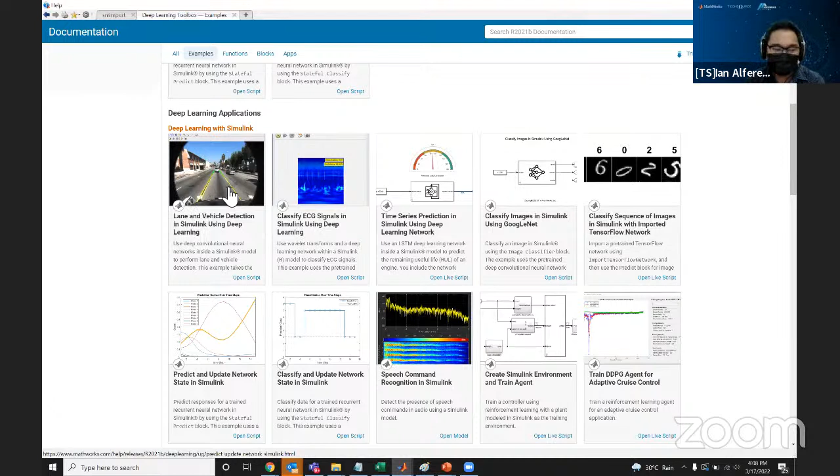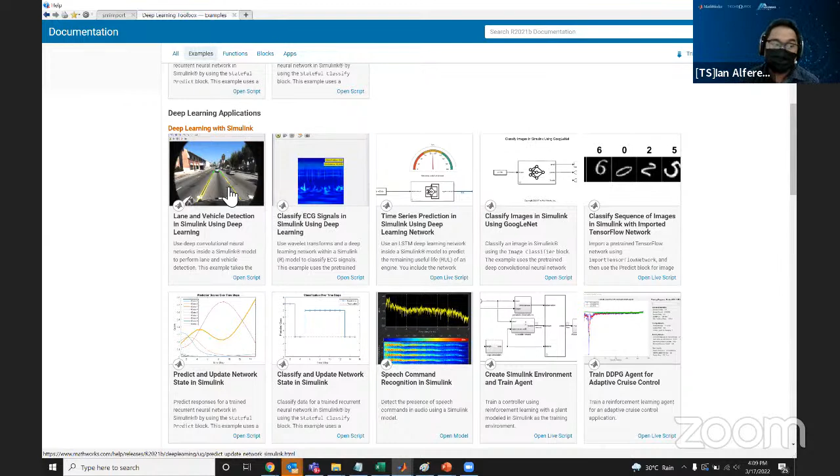These examples are actually in the Simulink environment. So as I mentioned, if you are able to bring in a robot model or any physical models in Simulink, then there's actually a lot of opportunities for you to bring in controls, image processing, computer vision, or whatever it is. Because once you have it, we do have blocks already available for you. This is where you can actually have a mathematical model or a deep learning model or whatever models you have, and then bring it to Simulink and do your simulations.

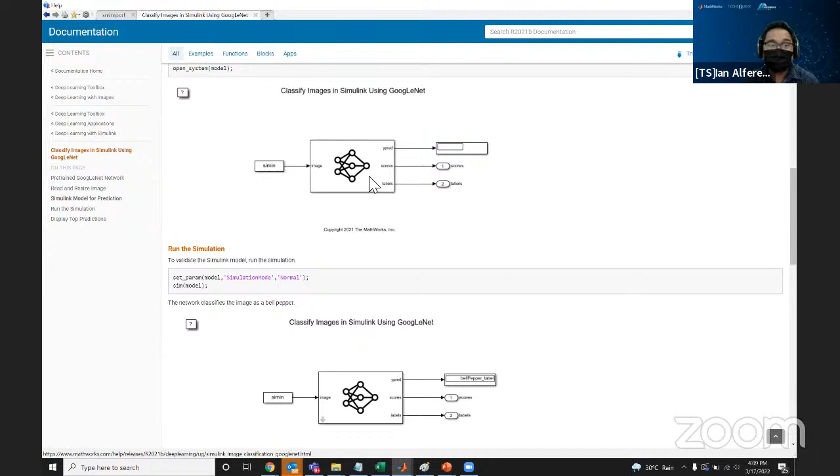And the nice thing about the latest release of MATLAB and Simulink, just to give you an idea, is that we can actually connect to third-party simulators. So when I say third-party simulators, if I just go to an example here, if I go to documentation and click on, let's say, Vehicle Dynamics Blockset - where is it? Vehicle Dynamics Blockset. We do have the opportunity to connect to third-party scenarios.

So for example, you can get a connection to Unreal Engine. If I go to robotics or ROS toolbox, this is where we can actually connect to Gazebo. So this is something where you can have a simulation of a robot at the same time as the Gazebo environment. But again, for me, you can start with some references, and we do have a lot of examples wherein you have Simulink, you have that AI component, and you can just bring it in.

So this is some of our examples. This is an example of using Simulink - there's a Gazebo environment, but we're controlling the robot in Simulink. Okay, did I answer your question? Okay, thank you very much for your detailed explanation.

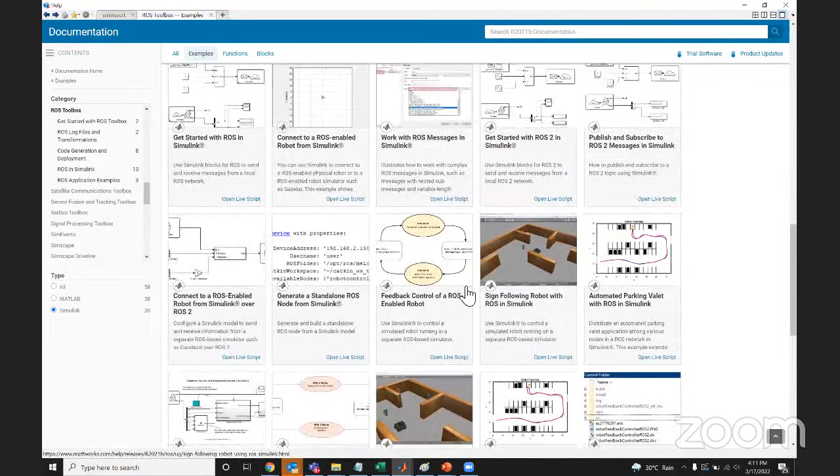But I think you need to try it out, again it depends on the applications. So you can see it's actually doing sign following - there's an image processing use case for that. But as I mentioned, it's a model. So if I open this live script and open that model, this is actually the model. If I open the model up, you will notice there's a component of the image processing algorithm.

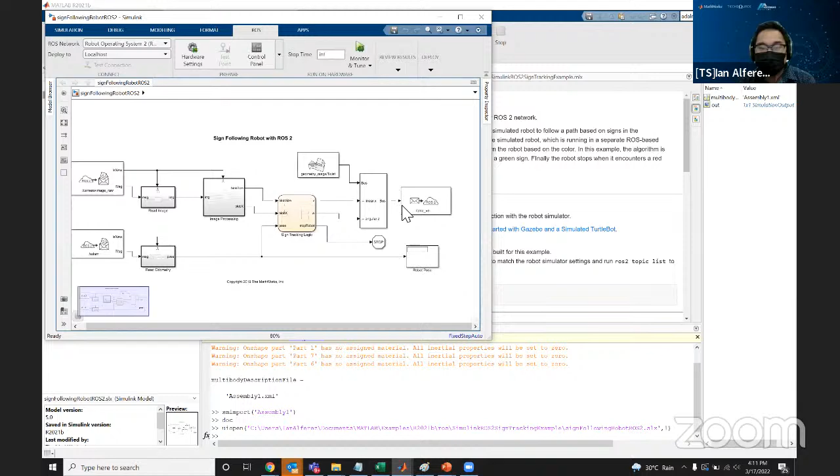And there's also, because I'm using ROS here in the sample, we're actually sending commands to the ROS environment. So if I increase the size, you can see we can bring in ROS data, we can bring in the odometry data, then we can command the velocity through ROS, and you have this image processing component here.

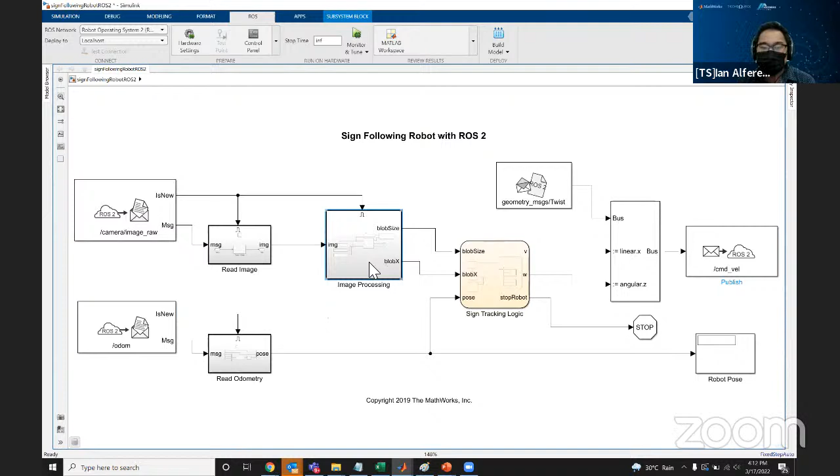Okay, yes Mr. Ronnie, there's another one who raised his hand. Thank you. Sorry, I have two meetings today so sometimes I miss things. I have a question.

In ROS, there is a very famous capability: support for multiple machines. So if I have many machines, they can be connected together. Is MATLAB also supported for that kind of multiple machine connection?

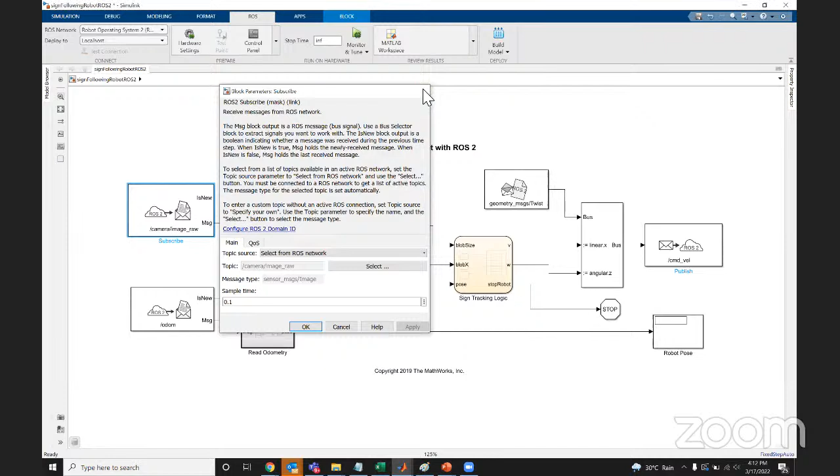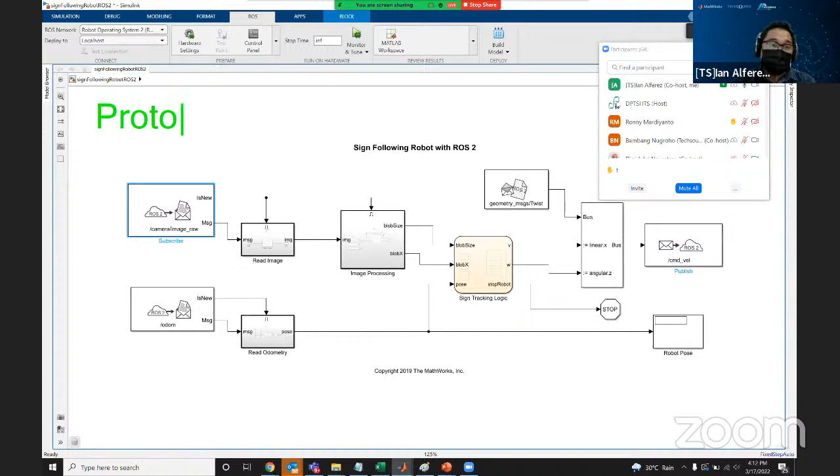Thank you. Yes, by right. So when we talk about ROS, that's going to be in the next episode, but in advance, there are two things ROS can do: one is prototyping, and one is we can deploy the ROS.

When we say prototype, it means I can run it in MATLAB, but I need to specify the IP address, since ROS setup is done by IP address. So if you have another robot, that might be IP address 192.168.1.2, and another robot might be 192.168.1.3. That's where you can control the robot and prototype on it. So when you say prototype, my MATLAB is running together with that robot.

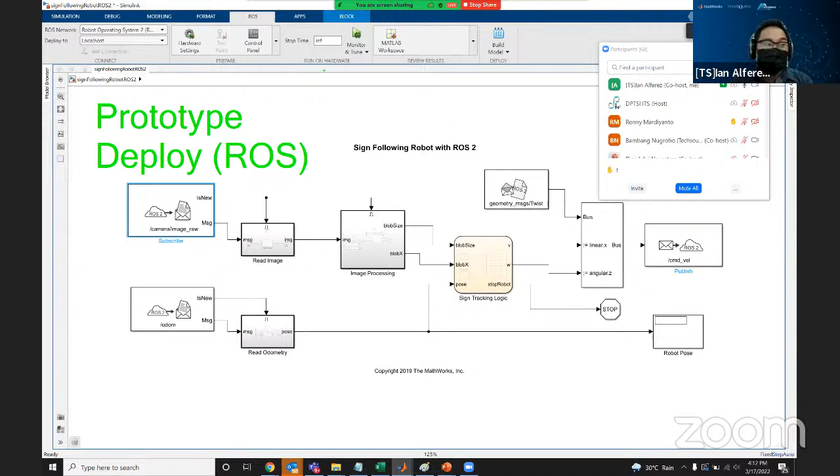But another feature we have is that we can generate C and C++ code and deploy that ROS node to ROS-compliant hardware. As an example, if I go back to some examples here, we do have examples to deploy to, let's say, a Raspberry Pi or NVIDIA Jetson.

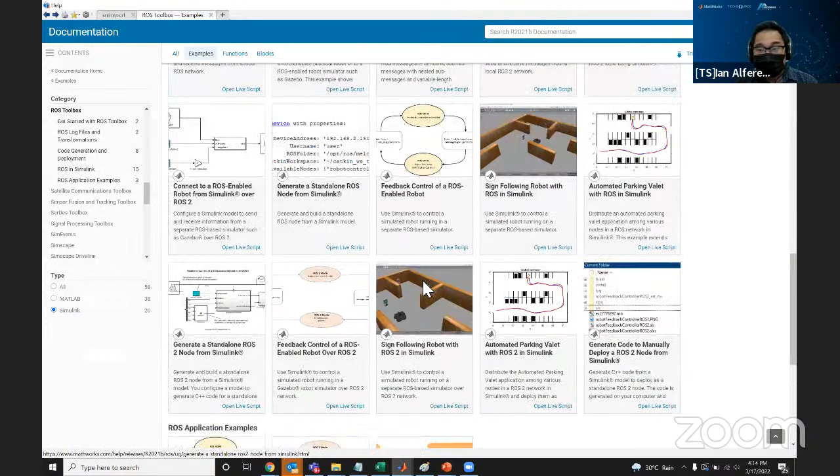Let's see if there's an example for Raspberry Pi here. No, but anyway, you would notice that we can generate the node, meaning we can bring that algorithm to ROS-compliant hardware. That's something really good with MATLAB and Simulink, since you're not just stuck with your development computer - your algorithm, whatever you've written, I can bring to a Raspberry Pi.

Sorry, I have to stop. Yes, I think for ROS we have the agenda for the next session, next week. Sorry, Pak Ronny, I think for detailed information on ROS, we can continue next week.